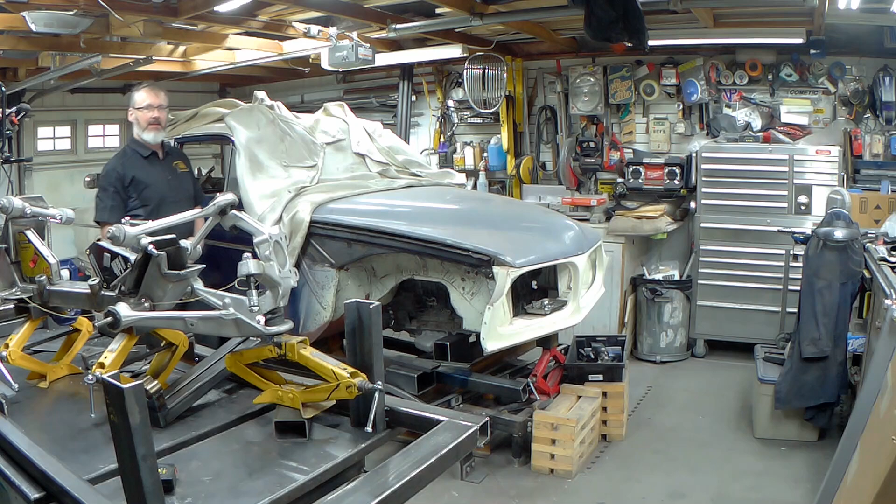So now that we're back, we've got the little bit of disaster going on here that you saw in the last episode. It's been around a week or so. I've been doing a lot of head scratching, a little bit of CAD work trying to get this sorted out. But I thought I would take you all for a quick tour on some of the problems we faced.

With this particular suspension system, I did some Googling around and found a few pages of blogs of people who have put up information on issues they've had with very similar looking suspensions to this one - something from the Corvette C4 or C5 family, maybe even C6. At any rate, issues with hot rod parts made to improve the handling characteristics of muscle cars and other cars that didn't handle very well at the start, that the Pro Touring crowd and others have adopted as improvements to their cars - and no doubt they are. But some of these are surfacing issues with respect to adjustability, geometries, and being out of square, all the same things we're facing here today in the shop.

So I thought I'd take you for a quick tour on what I've been up to here for the last week or so. It's not that I haven't done all this at least once or twice before on this particular suspension, but we will be covering in this episode how I'm going to fix it. So I've got a plan, right? I always worry about an old guy with a beard and a plan. So anyway, let's get started covering it.

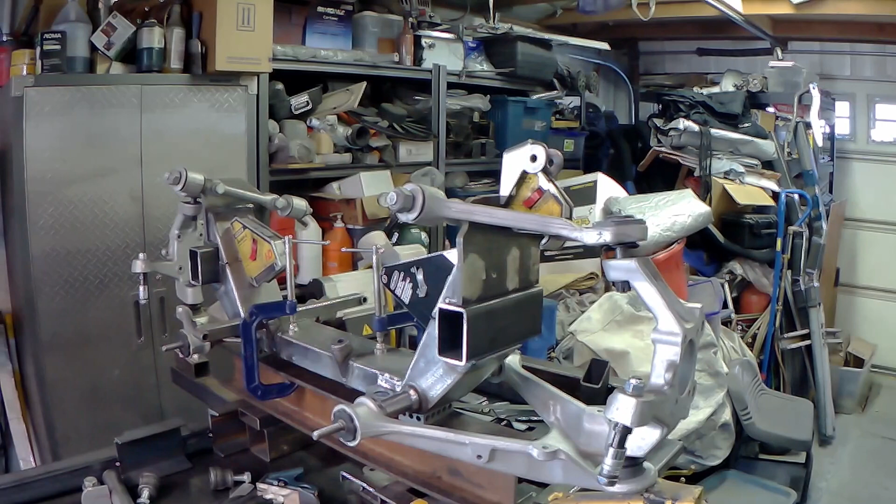Now what I did initially, in order to satisfy myself that I wasn't losing my mind, was set it back up on the jig. I'm just going to move it down a bit, get this into full frame here, and very carefully set it. Now I know the top of my H-beam isn't perfect, but it's not bad. I set it up very carefully so that from this reference plane - again, from this 2x2 frame we're using as a jig for everything - this has become the reference plane from which all the measurements I've made are taken. I know this point on the lower control arm is supposed to be 8 inches off the ground, so I've set this as close as I can, with shims and things, to getting it to 8 inches off the ground. So I've got that set.

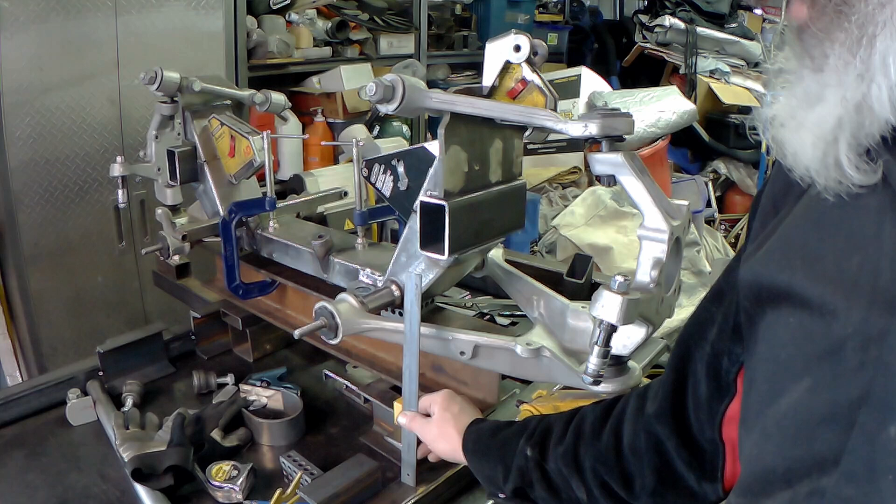Then I've gone ahead and remapped all of these suspension points - because this isn't the first time I've done it on this suspension. The points critical to having the suspension work properly are going to be the lower control arm mount, because that defines the pivot for the lower control arm. Currently this side is sitting cockeyed, sitting this way. Then the top here, the upper control arm and its mount - the pivot point for that is going to be in the center of this bushing. So I've located all of these points.

I've located the points where it bolts onto the part that attaches to the frame. I've basically gone ahead and located and remapped all of these points. I've had to attach this very firmly to the H-beam because it's twisted ever so slightly. Ideally we'd like to have these arms level and straight - these ones were tilted and definitely not straight.

Then once I put all that together - remember I built these brackets, these upper control arm mounts - because the engineering report I got indicated that if I moved it back, my suspension geometry improved. So we went with that improvement. We also didn't want as much anti-dive on that arm, so we wanted the pivot points to come down a little bit. So this is obviously a modified bracket that apparently maps more or less to what the original car was supposed to be - or at least that's what I was assured by the person who built this particular cross member.

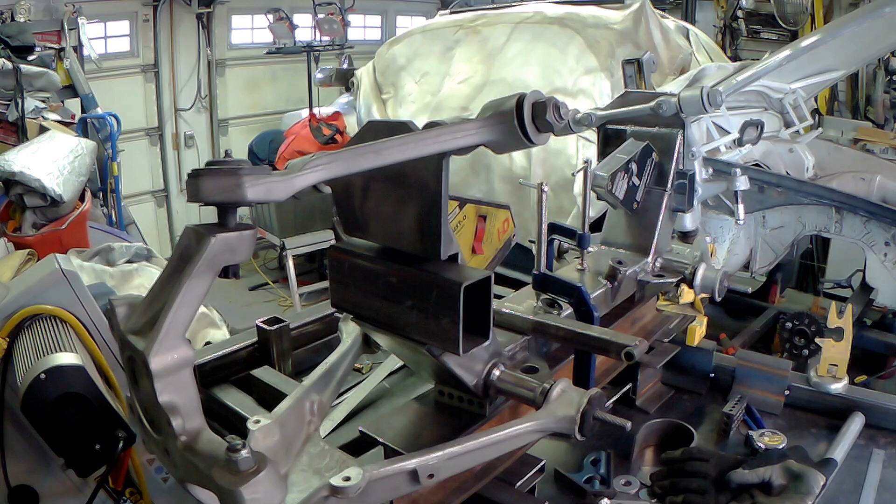Okay, so what I did initially then was to re-equip all of the frame just as a grounding exercise. I put it right back to what I received. So right back to, that is the original part right here. This is the original upright part here. It doesn't fit this frame rail. Again, it was designed for a different application than I'm currently using it in. So yeah, that was never going to work anyway.

I've got it just attached here with a magnet, and then I've taken the pivot points as they were originally mapped. So these two bolt hole points that locate the two pivot points for the upper control arm, I've mapped the lower control arm, and then we've compared all of it. And one thing that I learned when I did this was not only do we have the problem here with the lower control arm, we also have a problem with how centered this is.

And it's not actually the frame rail to frame rail. So if I set that frame rail there and that frame rail there, if I measure that distance between the frame rails and I compare that to where the distances are in everything else, it doesn't sit square in the car. So it was sitting over to one side by almost 1/4 of an inch, which is not insignificant. Again, I'm sure all that is some allowance for production tolerances. I'm trying to build a car that doesn't have production style tolerances. I'd like to build it so that it's reasonably accurate.

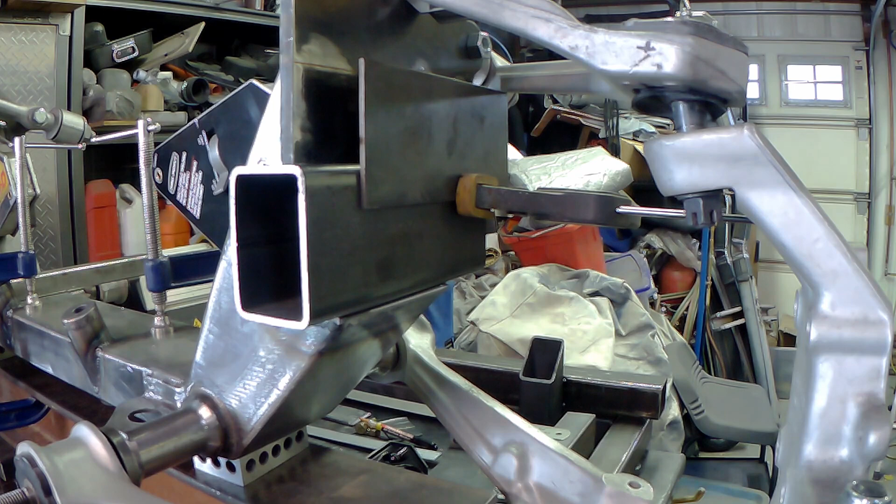So what I've done here is I just scribed a line 2 inches above the frame rail, and I've added just a piece of material simply to check for clearances, and then I've moved the suspension through a little bit of travel here, and I have to hold that upper control arm so it'll move nicely. But anyways, we moved it from the start position here. Okay, so there we have, that's level on the lower control arm. And you can see here, this is definitely going to represent a tight spot for us, as the frame rail is going to have to come up here. The frame rail will no longer be down there.

So as we come down, I was able to get, until it was going to foul the area, right about there. Go a little further and she touches, so we don't really want to go there. You can see it now. There's your tight spot right here. Now it's to the inside of this and level with this, but that's approximately where this rail normally will turn down, and I'm sure I'm not going to be able to move that location. So that's our tight spot.

I've only got, in this case, about 2 inches of droop travel. Suspension design says 3 is what we're after here. It's simple enough to get. If we went down 1/2 inch, which we can easily measure here and then scribe a new line. If I go down, reattach my plate here, I know it hangs out a ways before it goes down in the design, and then I just double check the front and back edge of that. It's level enough for this kind of work.

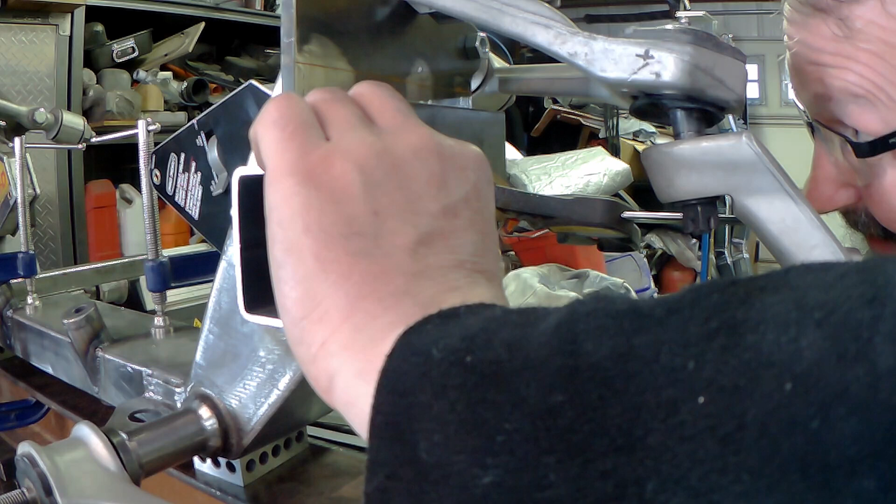Okay, now can I get, and holding on to that, I think 1.5 inches is going to be golden. I'm all out of jack travel here as much as anything. And the suspension is now almost at a full 3 inches of droop, almost. And we're still a finger away here. We'd be at 4 inches of droop probably before I'm going to run into anything I would consider to constitute a problem. In fact, level that off a bit better. If I can get this jack just to... That's all she's got, Captain.

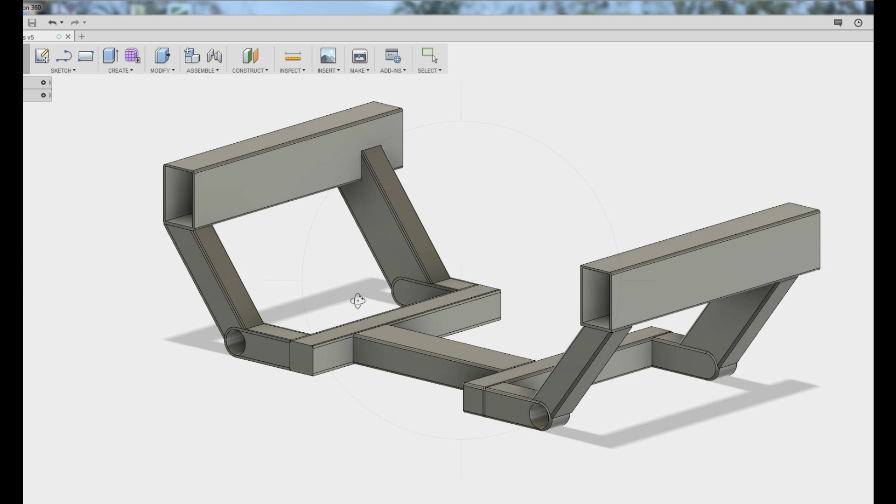So in the next section, while I'm waiting for some other parts to get cut, I thought we would whip it around here and take a quick look at how I've already gone ahead and built. This is the lower control arm component here. I'm going to show you how I made that particular component in the next little section of video. We'll move on in further videos to show these uprights and the other associated parts that are going to comprise the rest of the build.

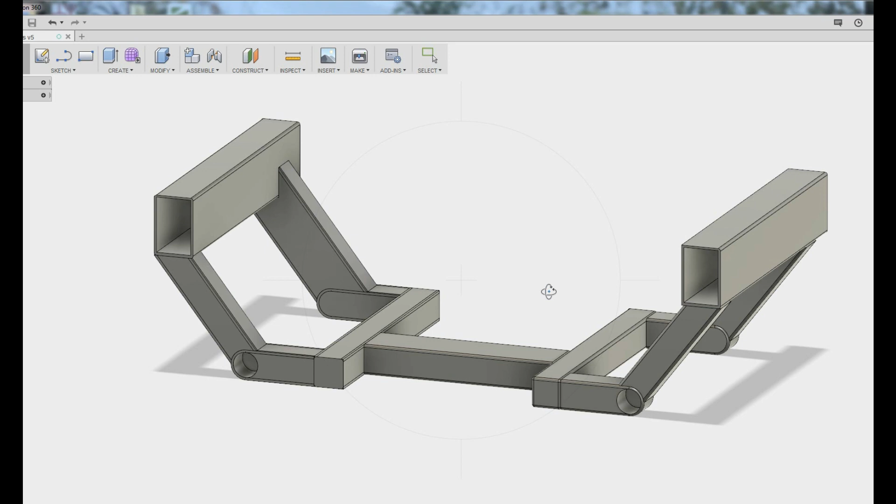So there it is in all its 3D CAD glory, to show you the parts that I'm going to make. Now my CAD foo is not really all that good, but here we are in Fusion 360. I've created a couple of the component parts. You've already seen me cut these out. This is that piece of 1.5" square tubing that we're using, and then these are the pieces of round 1.5" 100 thou wall or 120 wall. So we're going to use those.

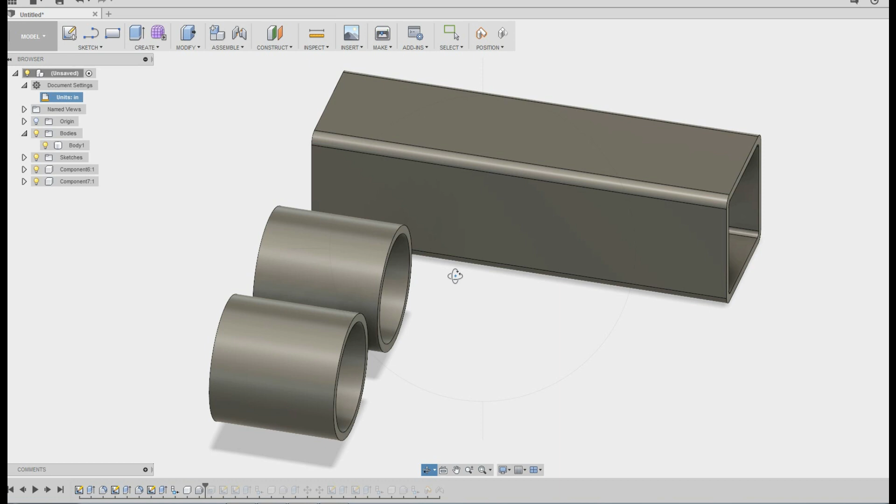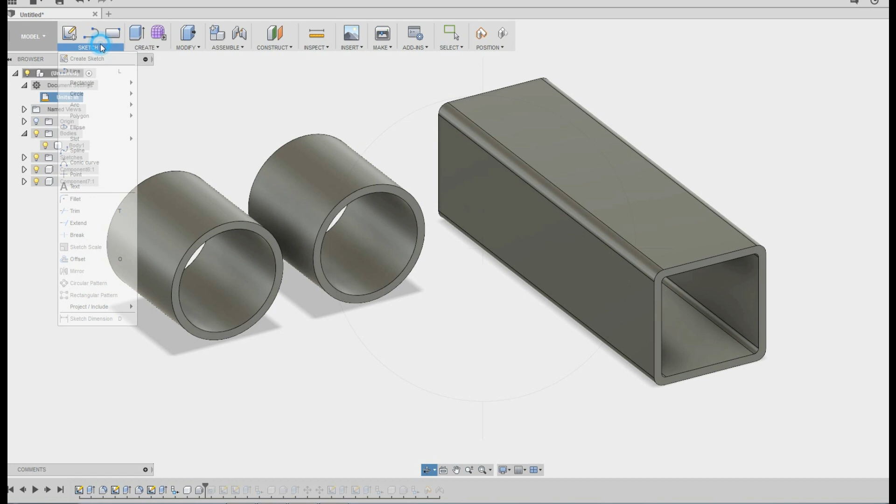Anyways, these are the steps. Basically, this is how this works. I have no idea if this is going to work, but I figured I usually go a little bit too quickly and I don't always explain exactly what I'm doing. On these parts, we're going to put a hole through the middle of here, and then we're going to array those bushings on top. Not really bushings, but the round parts. Okay, so first, let's just do this.

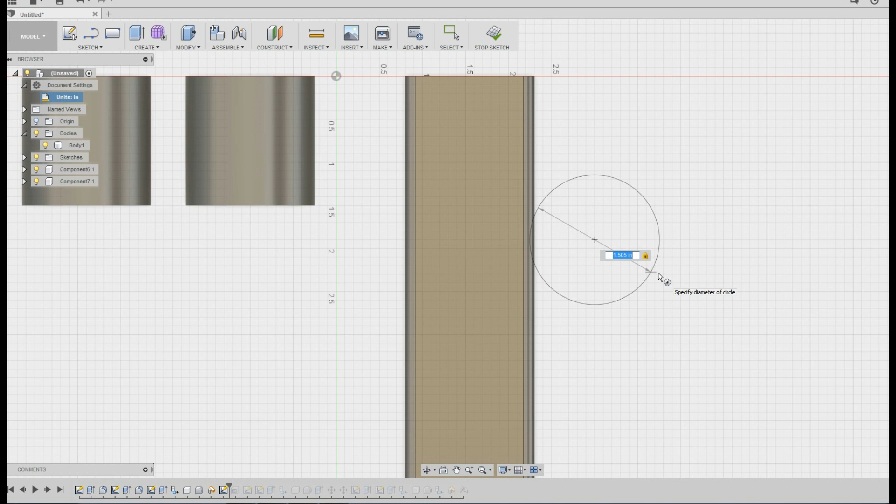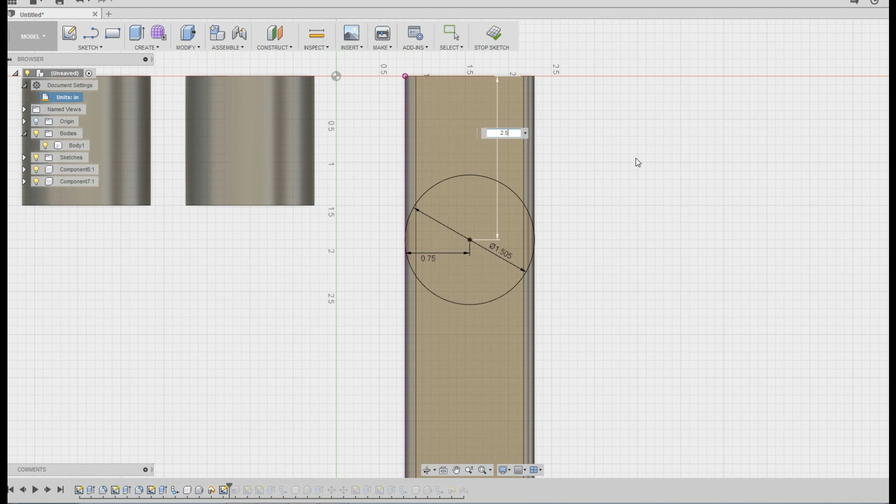We'll select a face. I'm going to draw my tool. There's no chance my hole saw is going to be able to actually be 1.5" around, and I'm actually counting on that. I need it to be just that little bit bigger. Now we're going to just move that. There's a distance that I need to be about that. And then I need this distance here to be exactly in the middle of the part. Okay, so with that, we should be able to get this all to work.

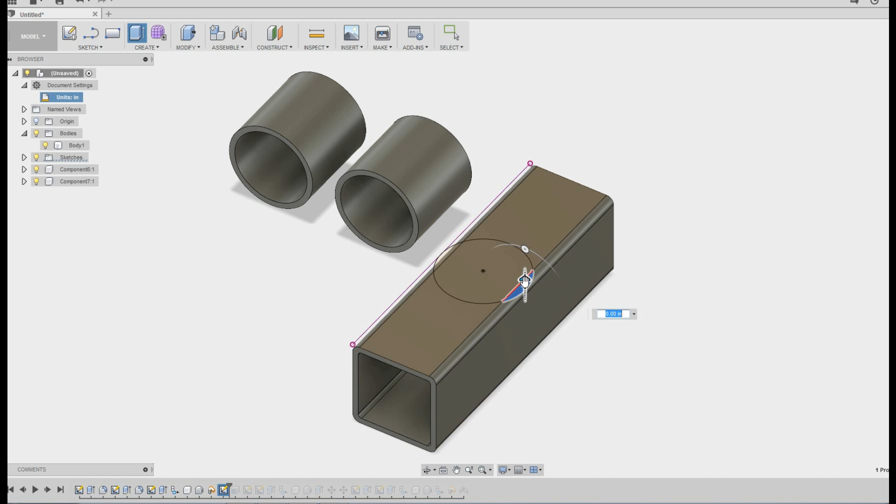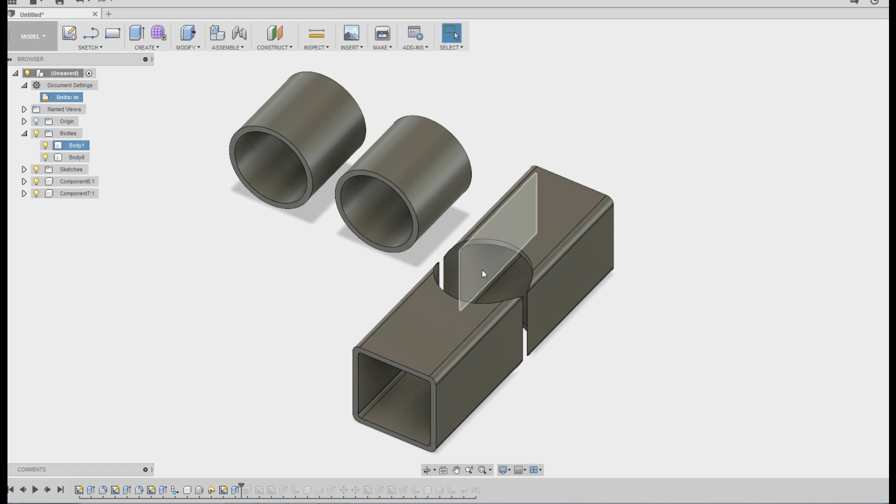So we now have placed that on top, and we're just going to fake drill it as if we knew what we were doing. Because I've radiused the edges there, it gives me that little bit of a chamfer. Sorry, it'd be helpful if we went to the negative side. I'm not trying to grow something out of it, I'm trying to punch something through it. So that should give me the punch through for these two separate parts here. When we drill it, we'll cut the edges of it, and then we should be able to get those other parts to go straight in to these parts.

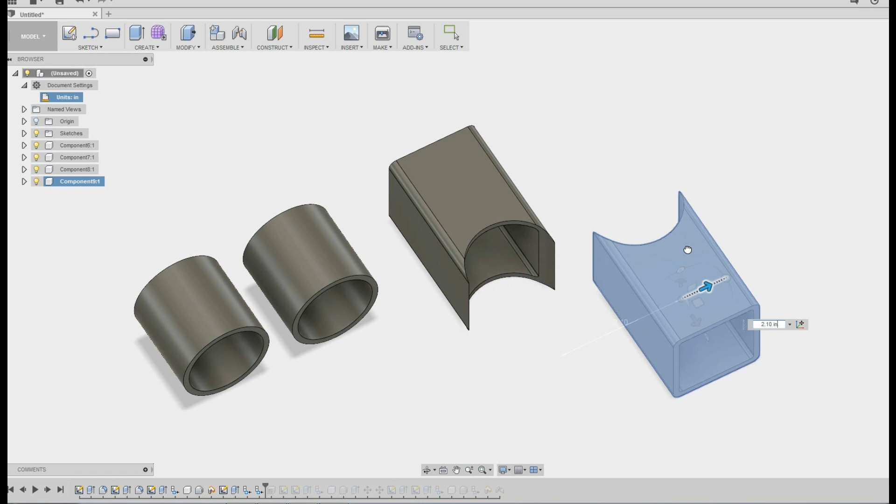So this is sort of the way I work when I think this out. I don't normally do this in CAD, but now I can select the entire component. If I want, I can move it to wherever I want to move it. Let's just slide this one over and put them up there. And if I'm super clever, I can get the rotate out of it too. I don't want to take too much time with this, but you get the idea of what we're going to do here.

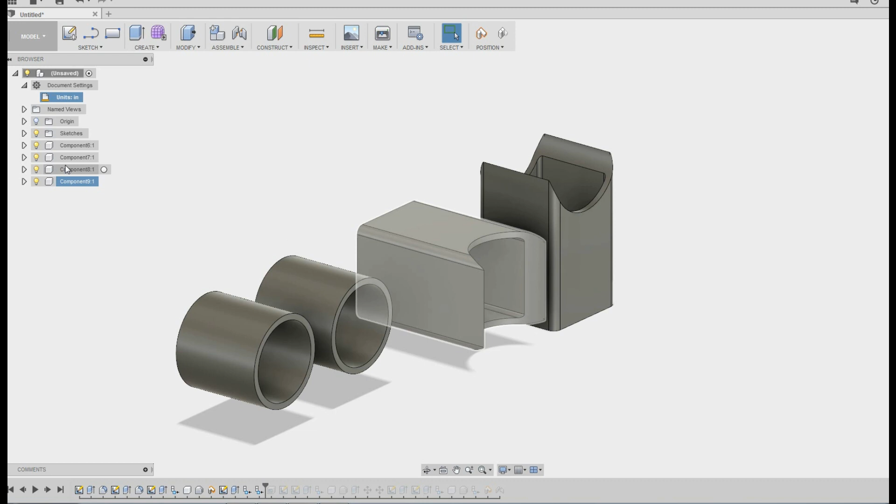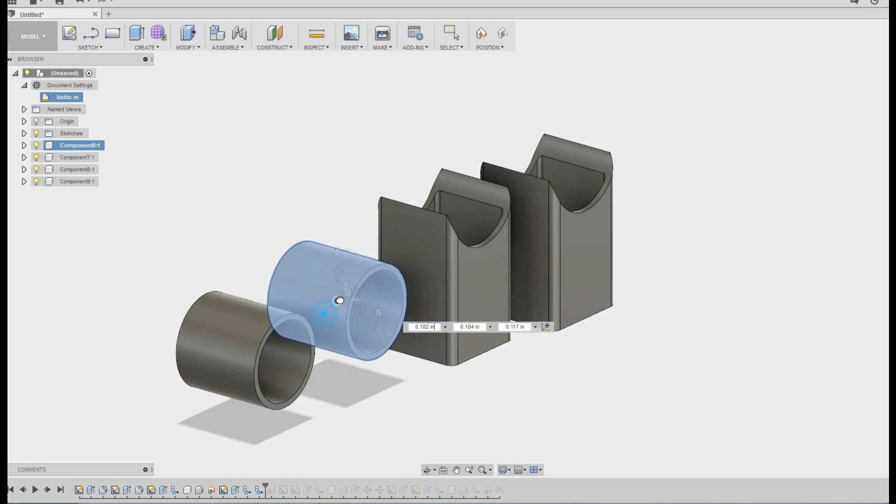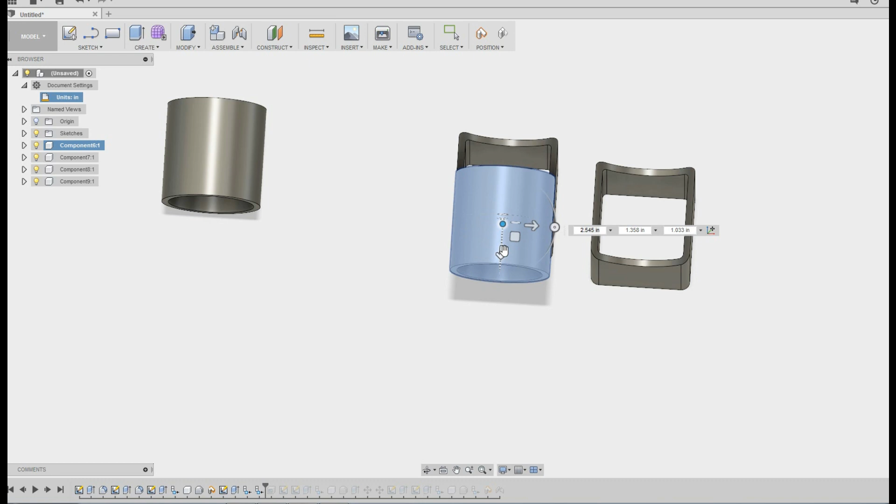We can grab this one as well, and we'll just rotate it up, and we can take the other components. This is stressful because I have to see if I can remember how to do all of these things. It's reasonably new for me. Actually, I want to do this differently, but there's zero chance that's going to work right, but you get the idea. It's always in the wrong place, whatever you do. At any rate, I'll get that to there. I do know how to do the correct move, but I don't have time right now, so I'll slide that back along.

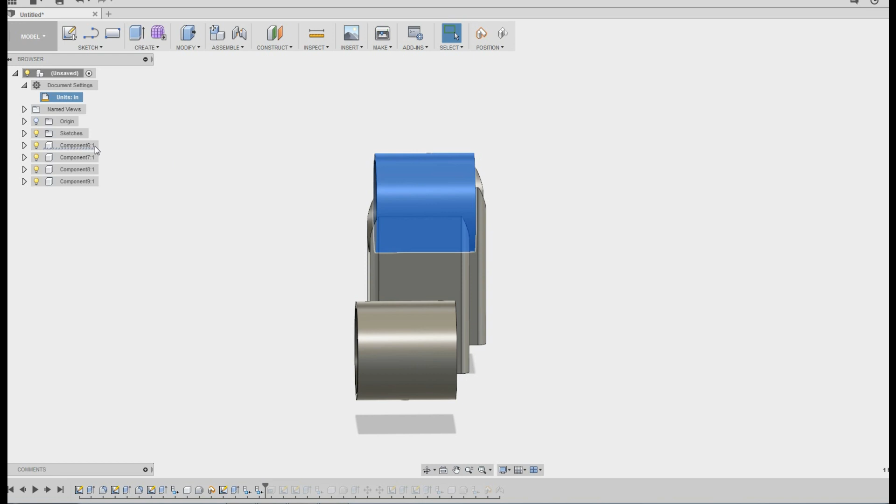Okay, so that's going to be the part that we're going to try to make. It's just asking me to be smart. Oh, we're not quite done. We'll slide that back just a bit more, and that's the part that we need. I must have shifted that while I was playing around. Okay, so that's the part that we need, this one here. So we're going to go ahead now and make that part.

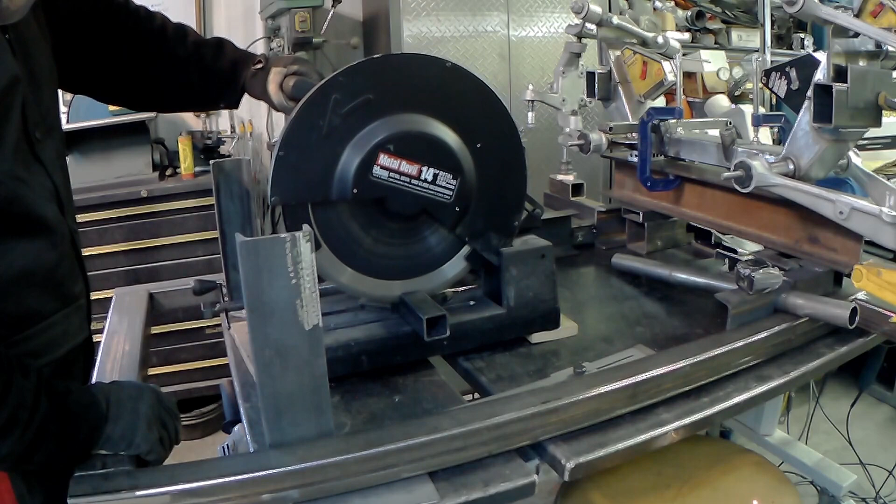Yeah, whenever I see this thing throwing sparks like that, I always get a little bit worried. It's like, it's time to get that blade sharpened, and you can have them sharpened. I have a local guy who sharpens them up for me. You get a few hundred cuts out of these dry cut saws, by the way, if you're interested.

Now I'm setting up for the round part to get cut off here. You know, if this was a fancy YouTube channel, we'd go ahead and part it off in a lathe that we own, but I only have a saw. Funny, I can get these things reasonably accurate if I'm really careful with the measurements, as you see me just endlessly setting it up, and then, you know, don't breathe, just carefully, don't move it.

Anyway, and then we cut it off, and then I tried to fast cut all the rest of these so you didn't see that the switch doesn't work. The switch has never worked. It didn't work right from the first day I got that saw. I've had the saw for 7 years, and I haven't made any move to fixing the switch yet. So it's part of the charm of that particular tool.

Anyway, we'll get 4 of these cut, and then we're gonna run them over to the grinder, where I usually just take the saw marks off and then put a little chamfer on. These are gonna be a TIG welded part, so I'd like to get a little chamfer in there just for weld prep.

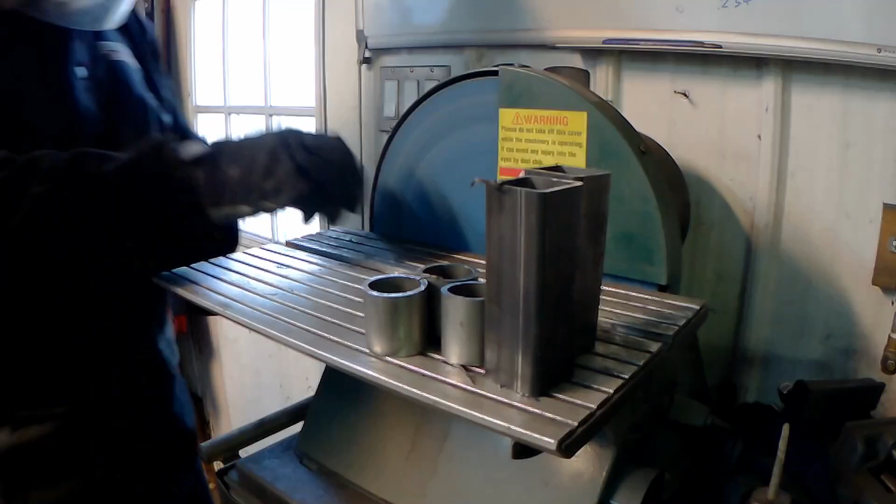Make sure everything's clean. I don't think I showed any of those steps, but whenever you're working with this kind of material, you have to make sure that you thoroughly clean the outside edges of it, the oils and whatever comes out of the processing of the tube. The round parts are drawn over mandrels with DOM tube. The other parts are just a hot rolled structural steel, and if you're going to TIG weld this stuff, make sure you get rid of that. So you have to get rid of all the mill scale off of it to weld it effectively.

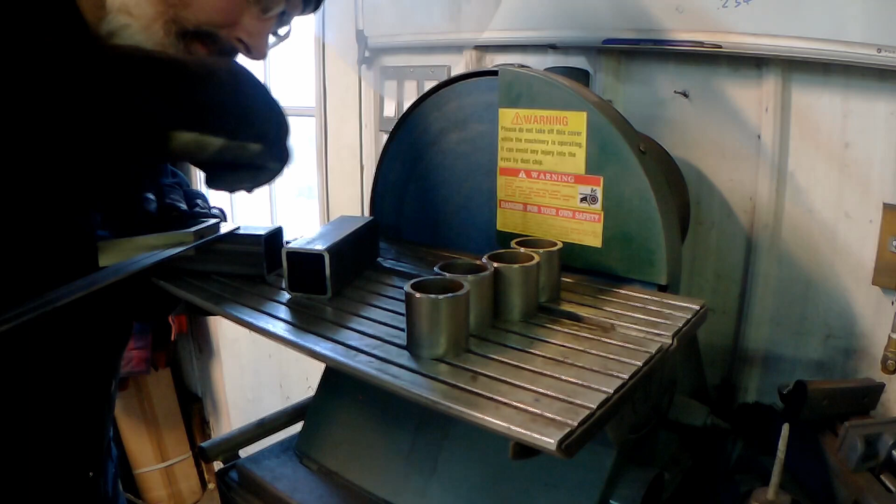So instead of getting real bluing, I'm just using my Sharpie there, just cheating. Putting a couple of scribe lines on so I can find the exact middle of the part. So we're pretty pleased with that. Scribe those in there. And over to the drill press.

So I don't know if this is the right way. I've just always sort of done it this way. But when I bought the drill press, I bought it specifically to find one that could spin slowly enough to effectively turn these hole saws.

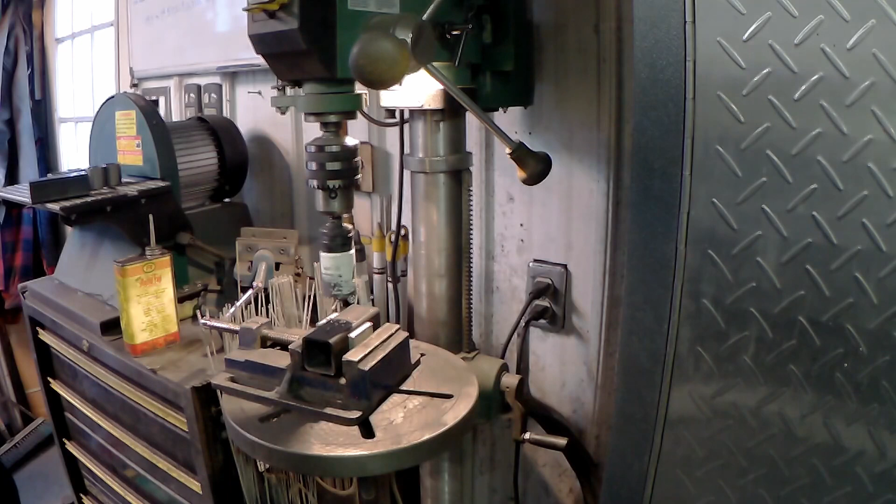You can see there in the clamp setup that I've put 2 aluminum blocks on either side of the jaws, and that's because the CAD's already shown us that we're probably going to cut through the edge, and I just don't want the hole saw actually hitting the hardened jaws of the vise. So I've centered it, just a little pilot hole there, centered where I want it exactly. And then I've got a welding clamp and clamped that down. I mean, how else are you going to keep this in a centered position?

So here we go, drilling our hole. Sorry for the noise here, it's always terrible. Obviously I can tighten those belts up just a little bit more because there's a little slippage now and again. You just sort of get used to the pace of your own hole saws as you're going. Here we go, almost all the way through. Thank goodness for video editing. A little bit of cutting oil always makes things go better.

Here we're just about done. Last little bit. Now I take it really slow because of course I'm taking that partial cut all the way down the wall of the tube, so there's no point in rushing that. So here we are, we got it out. Just like the CAD drawing, hey? Can't get any better than that. I'm super happy. A little slug out of that.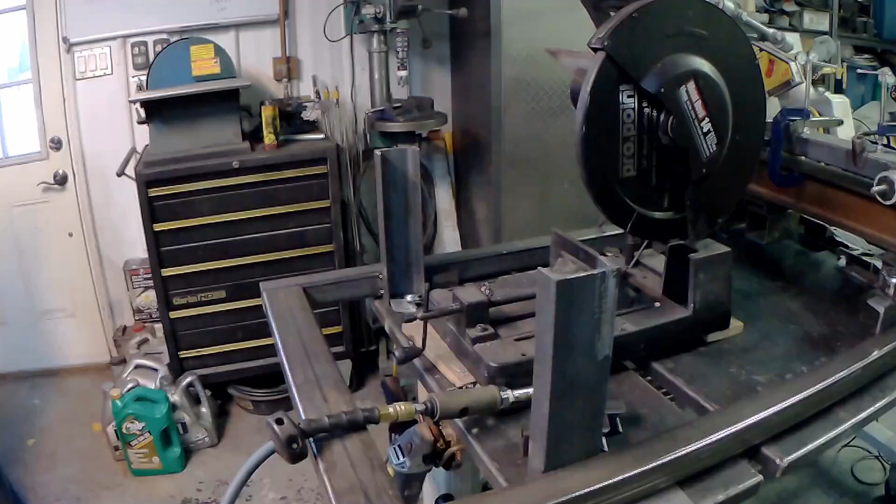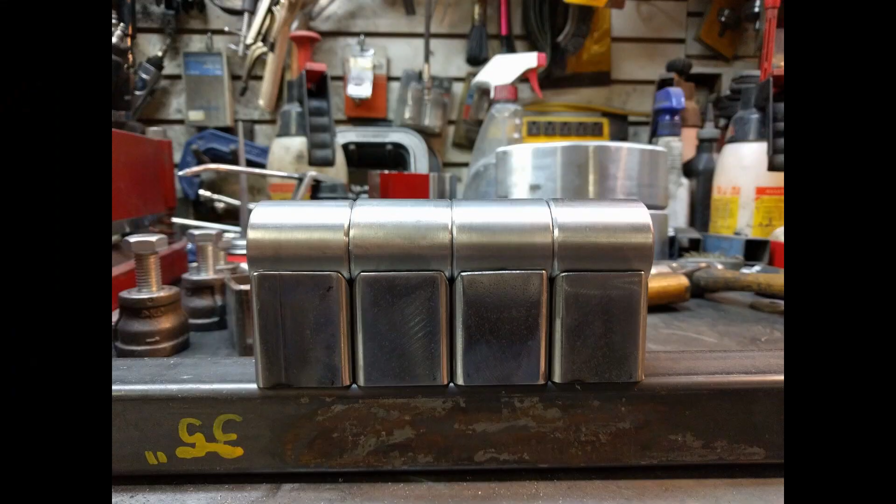Alright, so it's a little deburr here. So first with the die grinder. Wow, that's a terrible noise. Sorry about that. But here's the die grinder just buffing off the edges. Again, we're going to have to TIG weld those, so give them a little weld prep, make sure everything's nice and clean. Get the insides too. Until you've done it a few times, you don't learn to clean your parts properly, but clean the insides of those. Anyways, there they are, all done.